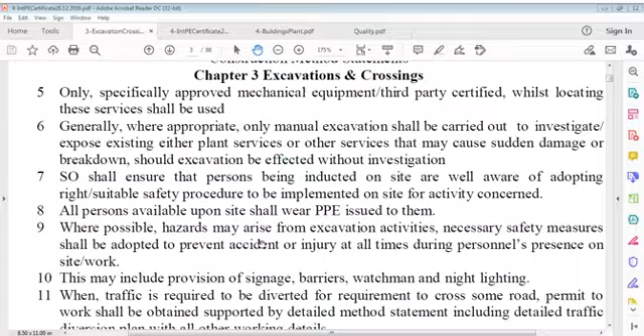Backfill for underground installations, fill grading and paving, testing laboratory, etc, etc. All these responsibilities go there. And safety, very important point, as I said.

So toolbox talks are directive ones. You have to use this, for example you have to use axe like this. You have to use the tool, you may say machine, you have to use this. The operator has to know the best way to use it.

Must have activity-based precautionary measures, and how you have to take care of preventing accidents. How people should be safe, and also what are the chances of caving in, and how you can use your spade or shovel, whatever, how you can use your generator, whatever tool you have. You can say it's talking excavation only, so you have to talk about that tool, site preparation tools.

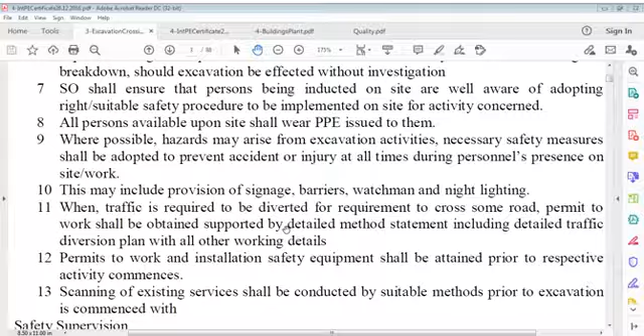When traffic is required to be diverted for the requirement of work to cross some road, a permit must be issued and obtained from the authority. That is regular law. You have to divert that area of traffic, and you have to make a diversion statement, a diversion plan, attach it with the method statement, and apply along with that method statement for that permission.

Permits to work are required for installation of safety equipment and for every activity that you do in that area. You also require services knowledge, which can include scanning of existing services, conducted by suitable methods prior to excavation starting.

Safety supervision is a very important point. A competent inspector must visit the included area daily to assess the safety measures being conducted, to make sure those safety measures are okay for that purpose. If defects or snags are found during that visit, this must be notified to the working supervisor available, who can immediately act to bring adopted safety measures to an acceptable standard.

There may be certain incidents where a utility is not identified, is discovered, or is damaged. All works must stop in that area, and the operator, shift control, and HSE department must be immediately notified.

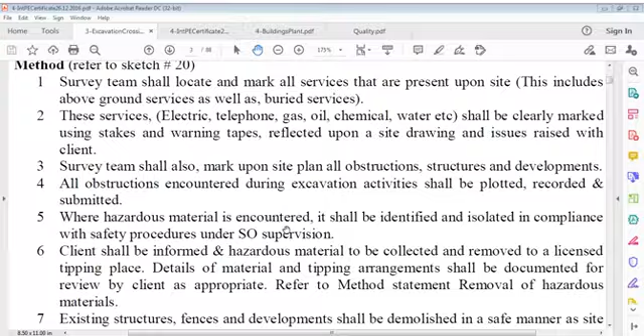Then there can be other obstructions as well during excavation, other than these services. There may be hazardous material available here and there. Likewise, there may be existing structures, fences, and developments which have to be demolished, and they have to obtain a permit for everything that's required, and figure out how these obstructions are to be removed from these existing elements, and how to handle and tackle that.

Otherwise, we have to discuss it with our clients or authority, and once something is fully exposed, we see how to handle existing soil, top soil, and bottom soil. Then, whatever terrain we have, we have to construct some access roads. We have to do something on that.

This happens: what quality of soil we have, how and what level of road we can build, what should be the structure of that, and how to compact it. This means we should have an engineer related to soil, a geotechnical engineer, and quality people. Of course, quality people come from the same background of engineering.

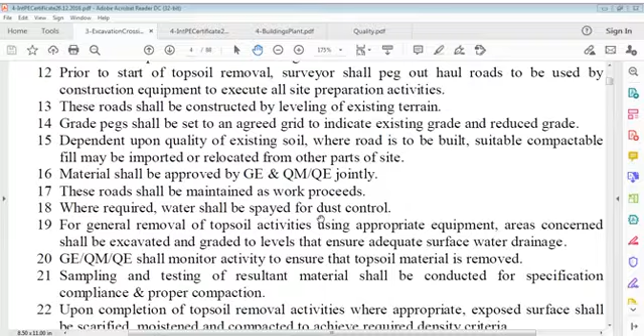And how to take care of the soil from environment impact, wind impact - all this we have to take care. It's not necessary to do it full, it depends how many tests you conduct. Then we have to transport material from one place to another and deposit somewhere, fill there, level there, add moisture there. Stockpilings are required, all these are required. There's a lot of work in that site preparation - you have to do everything required, which gives benefit of record as well as benefit of working.

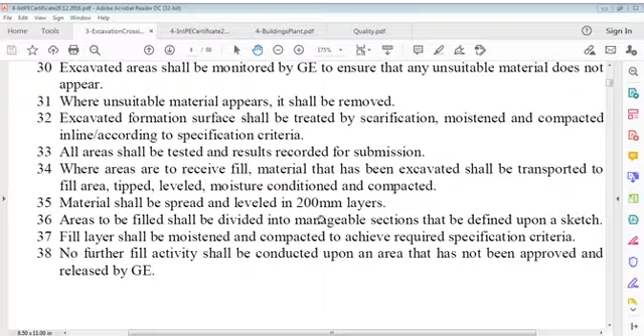We can also test the strength of soil we excavated. We have it in site, we can test it, or we can mix it with some other material and test it. That is what we discussed, and I can't speak again word by word. If I find time, I'll speak at the end, no problem.

That is what you say, verification exercise. Verification exercise for fill activity is conducted to establish economical and effective methods for fill activity in areas which are indicated below. You can say the title is verification exercise for fill activity, or to ascertain its strength - conducted to establish economical and effective methods for fill activity which are indicated below.

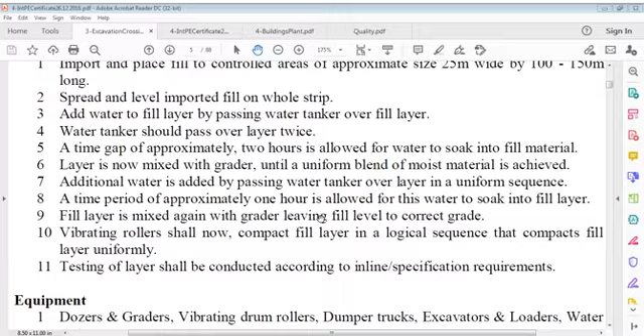Testing of layers shall be conducted according to inline/specification requirements. Then, what equipment do we need for that? We need dozers and graders, vibrating drum rollers, dumper trucks, excavators and loaders, and water tankers. These are the minimum; we have used them all in this activity.

Then there was nothing - we assume there was nothing prior to construction. The whole site was fit for preparation works, and such a project is called a greenfield project.

Once you are ready with the site, to some extent you can say all obstructions have been crossed, then you have to do something else. Now first of all, protection of existing services - services protection. It's also a very important point; you have to protect all services.

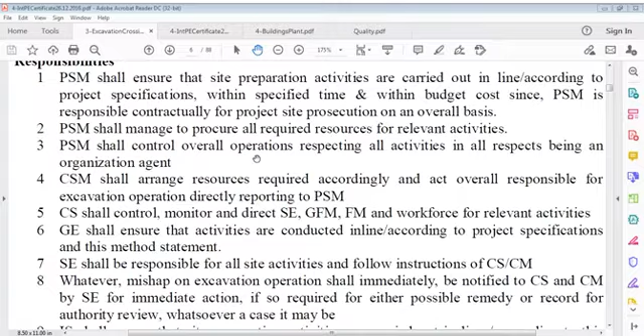Responsibilities are same as usual: project site manager, construction superintendent, infrastructure superintendent, site engineer, geotechnical engineer, safety officer, general foreman, quality control, surveyor, personal protective equipment, and so on. There's no major issue in that, and it says all the same responsibilities.

Now this was general. Now there is a specific responsibility in this, which is responsibility in addition to the foregoing general descriptions. That's also an important point to comprehend. You have to comprehend that.

The project site manager is to ensure that identification, protection, or removal, rerouting of existing services is conducted in a safe, methodical sequence as defined by this method statement, as well as directed by relevant authorities. Again, it's an important statement. You have to identify the service first, protect it, then remove it or reroute it, following the safe methodical sequence as defined by the method statement and as directed by the authority in charge of these services.

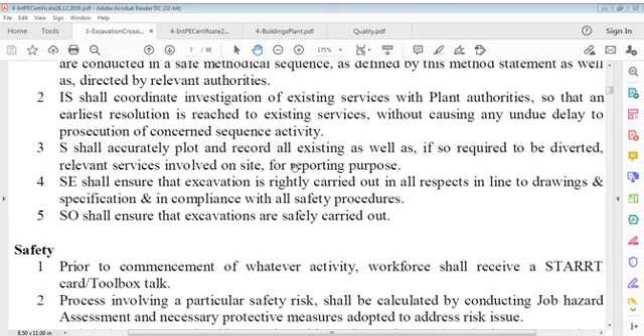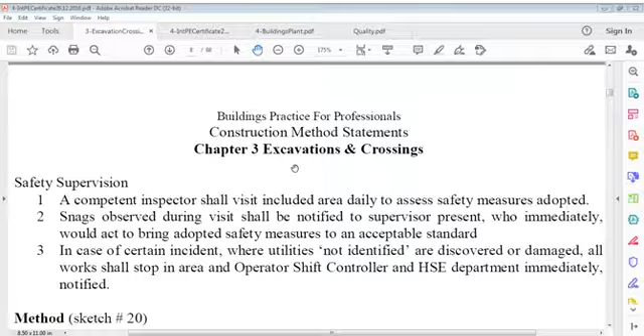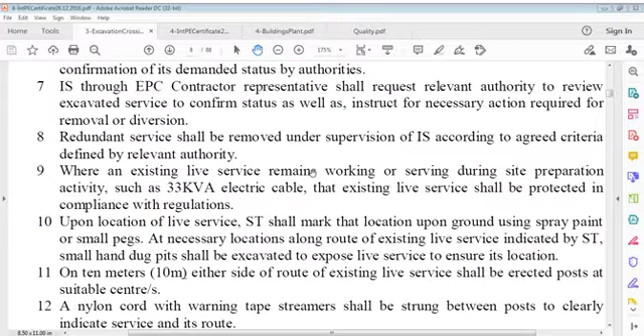Now, look, where an existing live service remains - working or serving during site preparation activity, such as a 33 kV electric cable - that existing live service shall be protected in compliance with regulations.

Upon location of that service, you can say the site team shall mark the location upon the ground using spray paint or small pegs. On both sides it will be barricaded, so nobody will be able to enter that area until it is declared safe.

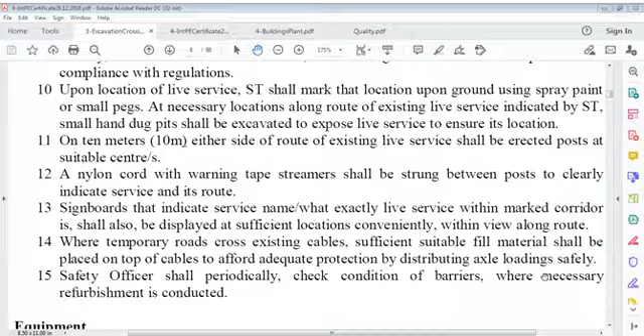Signboards that indicate service names, what exactly lies within the marked corridor, shall be displayed at sufficient locations, conveniently within view along the route. Where temporary roads cross existing cables, sufficient suitable fill material shall be placed on top of cables to afford adequate protection by distributing axle loads safely.

The safety officer periodically checks the condition of barriers where necessary, and refurbishing is conducted.

Then there are certain tools required: excavation tools, survey equipment, pegs, nylon cord, warning tape, and whatever records we have, we can say we want to reroute a certain cable.

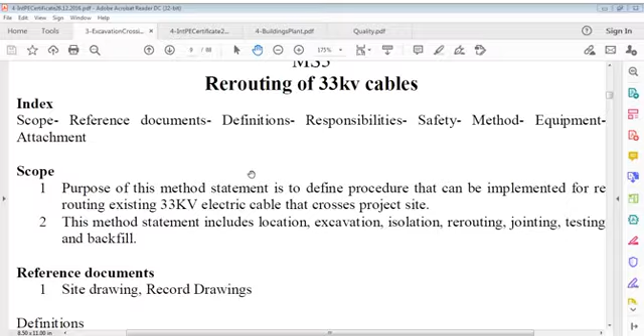The index is the same, the scope is a defined procedure that can be implemented for rerouting a certain existing cable. You can say a big one, a 33,000 volt electric cable that crosses the project site.

This method statement includes location, excavation, isolation, rerouting, and backfill. So first of all, identify where it is, then you have to excavate that, isolate it by disconnection, then reroute it, join again, test, and backfill.

Records and the same type of designations and responsibilities, we are not going to repeat them. Additional responsibilities which are very important, if you add to the existing previous normal responsibility, you can say additional responsibilities.

The project site manager is to define and ensure that the identification, protection or removal, and rerouting of existing services are conducted in a safe, methodical sequence as defined by this method statement, as well as directed by the pertinent or relevant authority.

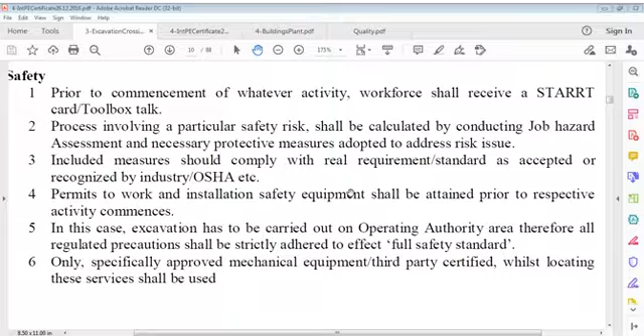Safety officials ensure excavations are safely carried out. There's nothing different here; full safety standards are to be abided by - toolbox talk, STARRT card, OSHA, all that, and same. Supervision is also the same, there's no major shift.

In case certain accidents occur, or utilities are not identified, discovered, and damaged, all work shall stop in the area, and the operator, shift control, and HSE department immediately informed to take care of that. There can be phone references, shift controller, emergency, whatever it is.

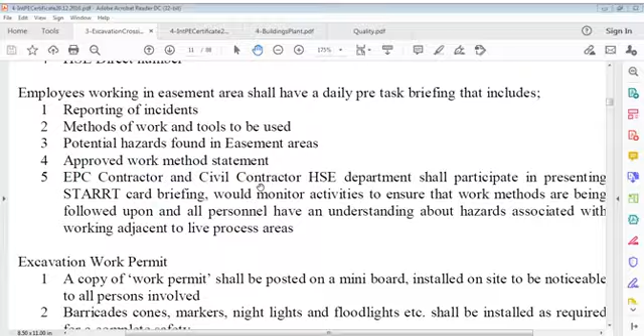Employees working in this easement area shall have a daily pre-task briefing that includes reporting of incidents, methods of work and tools to be used, and potential hazards found in easement areas, approved work method statements. EPC contractor and civil contractor departments shall participate in presenting STARRT card briefing, and would monitor activities to ensure that work methods are being followed and all personnel have an understanding about hazards associated with working adjacent to live process areas.

Work permits are required for excavation. The work permit shall be posted on a mini board installed on site, to be noticeable to all persons involved. Barricades, cones, markers, night lights, floodlights, etc. shall be installed as required for complete safety.

Flagsmen on all directions, in addition to traffic signboards. Flagmen shall be engaged to operate full time to direct traffic about excavation work in progress by waving flag signals for all vehicles passing by.

Excavation to expose services should be carried out manually. In case certain services not shown on record drawings, such as fiber optics, are discovered, further excavation shall be ceased until a decision for employing the hydro jetting method is taken up by plant authorities to be adopted for further excavation.

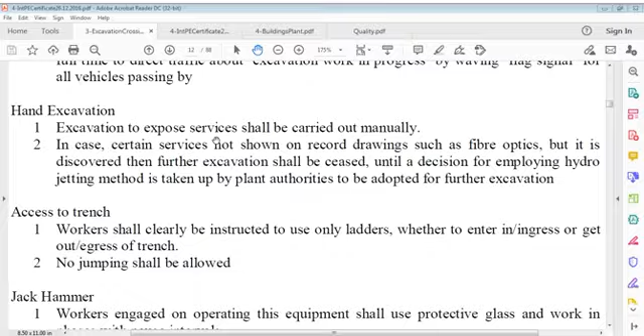Trench access means workers shall clearly be instructed to use only ladders, whether to enter in or egress out of the trench. Jumping is not allowed.

Workers engaged in operating equipment such as jackhammers shall use protective glass and work in phases only with rest pauses.

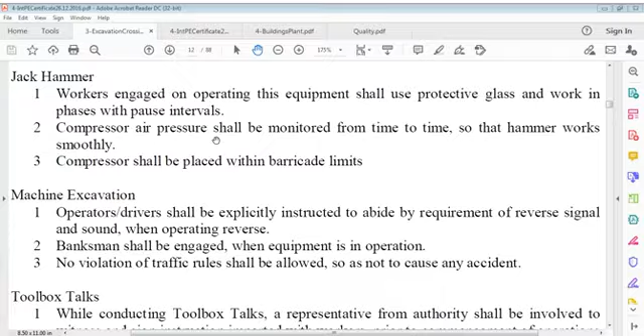Machine excavation: operators shall be explicitly instructed to abide by the requirement of reverse signal and sound when operating reverse. Banksmen to be engaged when equipment is in operation. No violation of traffic rules allowed so as not to cause any accident.

Toolbox talk: while conducting toolbox talks, a representative from the authority shall be involved to witness and sign instructions imparted to workers prior to commencement of operations. For record purposes, only English literate foremen shall be employed to work on excavation execution. Traffic management if required.

Signboards keep up: all personnel shall be briefed about safe keep up of signboards, barricades, cones, markers, and night lights, floodlights shall be arranged as required for complete safety.

No oil spillage shall be allowed. Sides of excavation shall be sloped with barriers placed to indicate excavation work in progress.

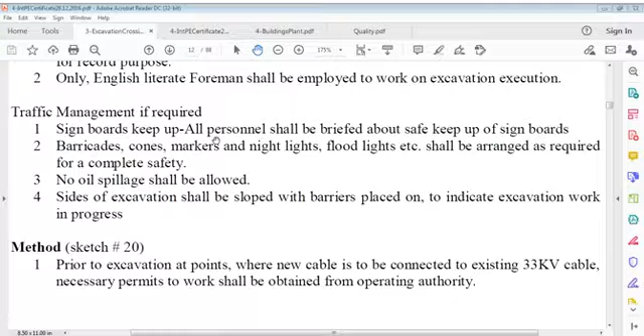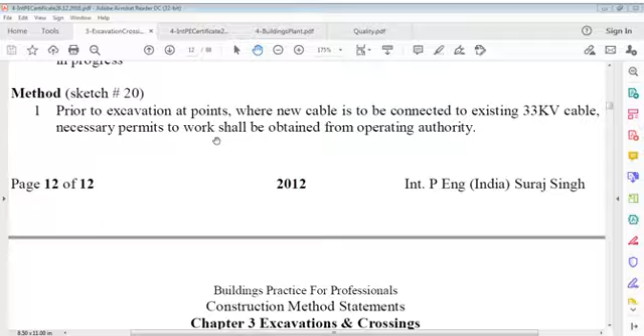So there are certain points from the flagman, from the excavation work permit, which covers what the flagman has to do, how hand excavation is to be done, how access to the trench is to be done, operation of jackhammer, machine excavation, toolbox talks, traffic management, and further points prior to excavation where a new cable is to be connected to an existing cable. Necessary permits to work shall be obtained from the operating authority.

EPC contractor method statement for conducting cable diversion shall be complied with. Existing route of the 33 kV cable shall be identified, marked, and barrier erected on either side, clearly defining the route access site.

When excavation has reached the required level, an appropriate sand bed shall be placed within the trench.

New cable supplied by the EPC contractor shall be laid into the trench in line according to approved drawing methods and standards. This includes placing of cable drums on a cable trolley and rollers.

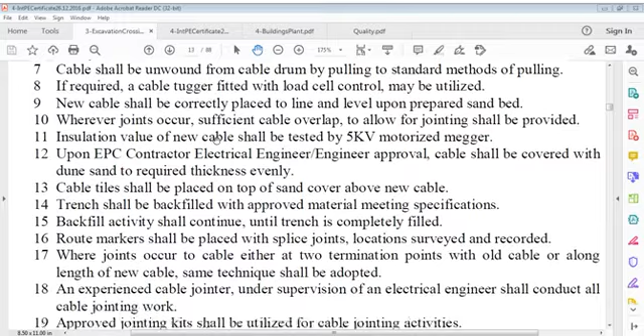Cable shall be covered with dune sand to required thickness evenly. Cable tiles shall be placed on top of the sand cover above the new cable.

Trench shall be backfilled with approved material meeting specifications. Backfill activity shall continue until the trench is completely filled. Route markers shall be placed at splice joints.

Locations surveyed and recorded. Where joints occur in the cable, either at two termination points with the old cable or along the length of the new cable, the same technique shall be adopted. An experienced cable jointer, under supervision of an electrical engineer, shall conduct all cable jointing work.

Approved jointing kits shall be utilized for cable jointing activities. Manufacturer's recommendations relating to installation of these jointing kits shall be complied with.

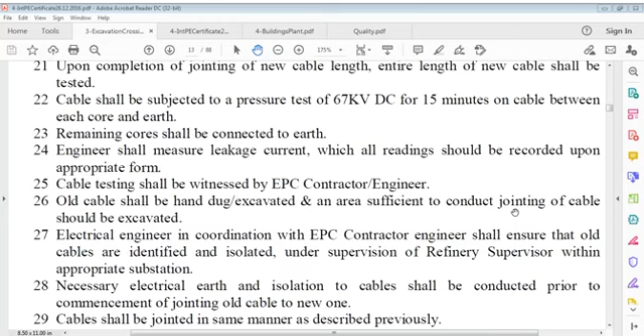The engineer shall measure leakage current, and all readings shall be recorded upon the appropriate form. Cable testing shall be witnessed by the EPC contractor engineer. The old cable shall be hand dug.

An area sufficient to conduct jointing cable should be excavated. Electrical engineer in coordination with EPC contractor engineer shall ensure that old cables are identified and isolated under supervision of refinery supervisor within appropriate substation.

Necessary electrical earth and isolation to cables shall be conducted prior to commencement of jointing old cable to new cable. Cable shall be jointed in same manner as described previously. Once old and new cable have been joined, these shall be tested by mega test at 5000 volt and HV test at 53 kV DC to establish its integrity and insulation.

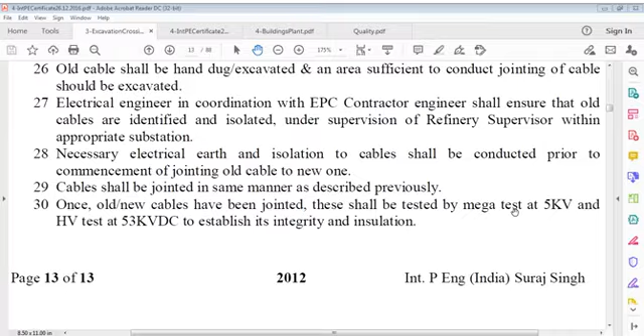Disbanded cable shall be removed from new joint cable by excavating and rolling cable. New cable route corridor shall be covered with sand, cable tiles and backfill material. Upon completion of cable testing activities, refinery electrical engineer shall authorize energizing of new cable route.

Disbanded cable route shall be excavated to expose old cable. Old cable shall be removed onto surplus cable drums from which new cable was coiled. These drums shall be stored on site for EPC contractor disposal.

A program to be developed by all parties of power outage windows shall be produced for tying activities of cables. Tying activities require equipment such as excavator, drum trucks, dump trucks, cable drum trolley, cable trolleys, and cable tugger with load cells. Attachment is contractor standard method statement for cable diversion.

This statement may be submitted by civil works contractor on behalf of EPC. EPC standard method statement is required to be attached.

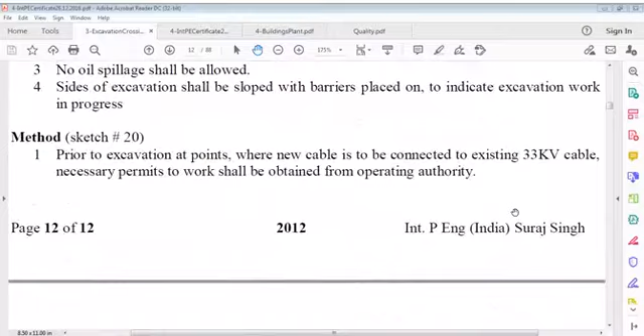So this is a very important point. Prior to excavation at points where new cable is to be connected to existing cable, necessary permits to work shall be obtained, and then you can have some more reading here.

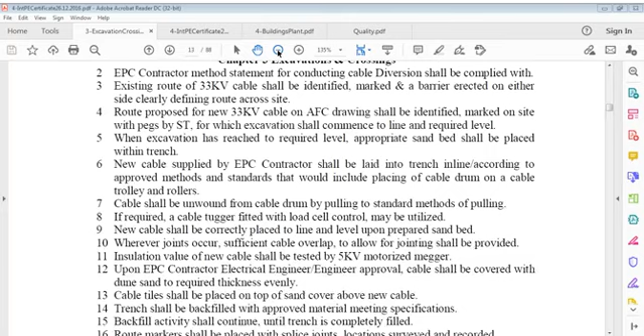Better read for 5-10 minutes so it's better to understand. Everyone can do it better, I think. Meanwhile, just take 5 minutes here, I'll be back in 5 minutes. It's better to understand this, it's a very important point, very very important to understand, because electrical cable is shifting. That's the important point, okay.

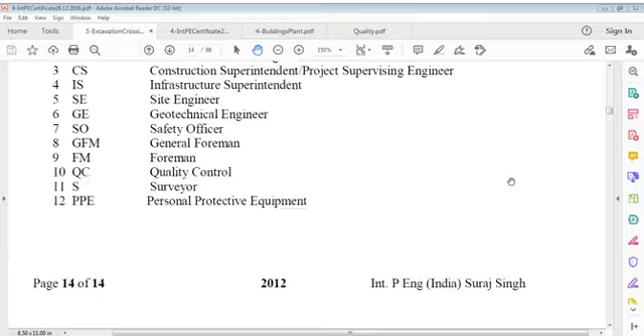I repeat only these designations. Project Site Manager means PSM. CSM stands for Construction Site Manager. CS stands for Construction Superintendent or Project Supervising Engineer. IS stands for Infrastructure Superintendent. SE stands for Site Engineer. GE stands for Geotechnical Engineer. SO stands for Safety Officer. GFM stands for General Foreman. FM stands for Foreman. QC stands for Quality Controls. S stands for Surveyor. PPE stands for Personal Protective Equipment.

And these responsibilities, I don't want to repeat them, no need. But it's better once you report so that you refresh, no problem.

PSM shall ensure that site preparation activities are carried out in line according to project specifications within a specified time and within budget costs, since PSM is responsible contractually for project site prosecution on an overall basis. PSM shall manage to procure all required resources for relevant activities. PSM shall control overall operations, respecting all activities in all respects, being an organization agent.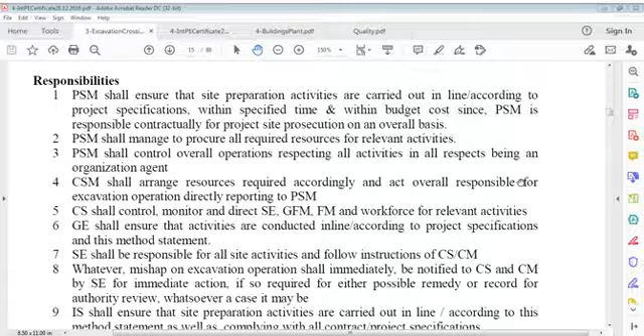CSM shall arrange resources required accordingly and act overall responsible for excavation operation, directly reporting to PSM. CS means Construction Superintendent shall control, monitor and direct SE, GFM, FM and workforce for relevant activities.

GE shall ensure activities are conducted in line according to project specifications and this method statement. SE shall be responsible for all site activities and follow instructions of CS and CM. Whatever mishap on excavation operations shall immediately be notified to CS and CM by SE for immediate action if required, for either possible remedy or a record for authority review, whatsoever the case may be.

IS shall ensure that site preparation activities are carried out in line according to this method statement, as well as complying with contract project specifications.

GFM, General Foreman, shall be responsible for the whole lot of workforce available on site for distribution, extraction of output, redeployment, supervision and controls.

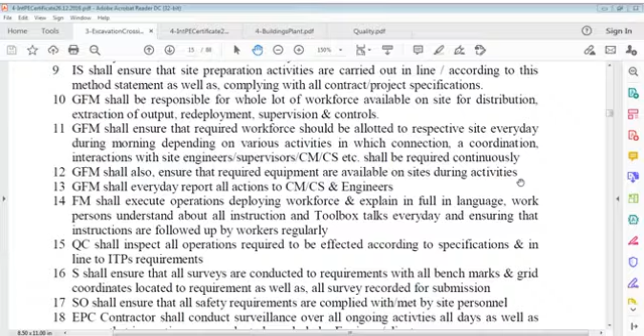FM shall execute operations, deploying workforce and explaining in full in language work persons understand all instructions and toolbox talks every day, ensuring that instructions are followed by workers regularly.

QC, quality control, shall inspect all operations required to be effected according to specifications and in line with ITP's requirements.

Surveyor shall ensure that all surveys are conducted to requirements with all benchmarks and grid coordinates located as per requirements. All surveys shall be recorded for submission.

Safety officer shall ensure that all safety requirements are complied with and met by site personnel. EPC contractor shall conduct surveillance over all ongoing activities every day, as well as ensure that inspections are conducted regularly by engineers and client.

Additional responsibilities: surveyor shall accurately plot and record all as-built marks respecting bedding, pipes and finished ground. Site engineer shall ensure that excavation is rightly carried out in all respects in line with drawings and specifications and in compliance with all safety standard procedures.

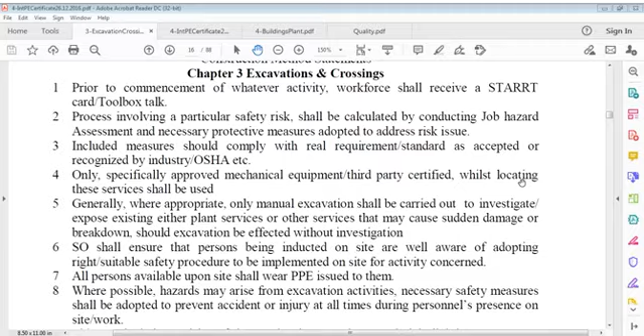Safety officers shall ensure that excavations are safely carried out and equipment operators comply with safety procedures. Again, this is the same as what we discussed about STARRT cards, toolbox talks and OSHA requirements, and whatever is required is to be done regarding hazards. Supervision is also the same.

Now let's discuss methods, sketch 25. Let us see what sketch 25 says. I'll chart out the sketch first of all.

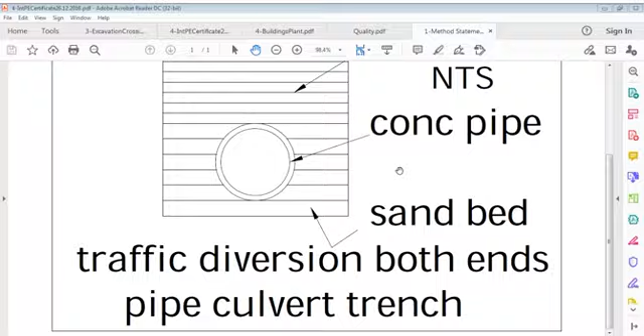Sketch 25. In this sketch 25, I have to find out... manage. Sketch 25. What is that? Okay, let's open this, I think it's the same. Okay, sketch 25, let's open this, see what we are talking about. See what it is. All right, we got it.

Now, setting out: edge coordinates of pipe shall be calculated from information on drawings as well as allowing for a 1:1.5 slope, and fixed in such a way that full length of pipes are used without pipe cutting.

Center line and actual width shall be marked on ground. We can refer to sketch 25.

Trench shall be excavated to correct width, length and formation using a hydraulic backhoe. Once bulk excavation is completed, wooden pegs shall be inserted showing elevations marked on them to guide and complete excavation and define formation level.

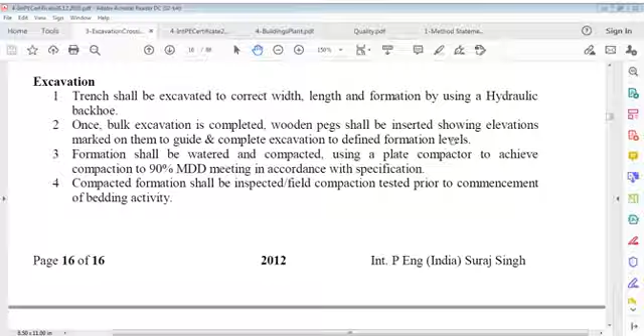Once excavation is complete and approved, bedding material shall be placed to a thickness of 150 mm, watered and compacted in compliance with specifications. Compacted surface shall be inspected, tested and approved.

Pipe work: socket position shall be set out on prepared bed. Manual excavation shall be carried out for the socket portion, ensuring that the barrel of the pipe rests firmly on bedding.

Concrete pipes shall be transported from store to location of trench and gently lowered into trenches with a crane using belt slings only, not chain slings, because this is a circular pipe and we can't erode the external surface of this barrel.

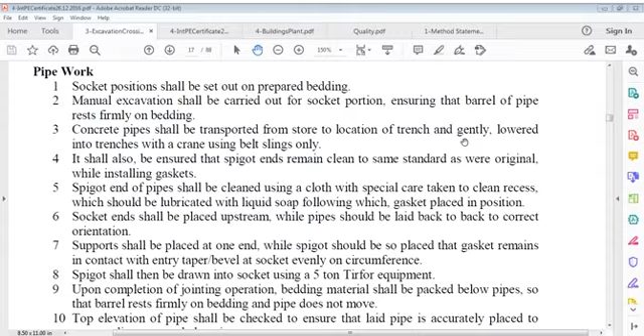It should also be ensured that spigot ends remain clean to the same standard as original while installing gaskets. Spigot end of pipes shall be cleaned using a cloth, with special care taken to clean recesses, which should be lubricated with liquid soap, following which the gasket is placed in position.

Spigot ends of pipes shall be cleaned using a cloth with special care taken to clean recesses, which should be lubricated with liquid soap, following which the gasket is placed in position. Socket ends shall be placed upstream, while pipes should be laid back to back to correct orientation.

Support shall be placed at one end, while the spigot should be so placed that the gasket remains in contact with the entry taper or bevel at the socket, even around the circumference.

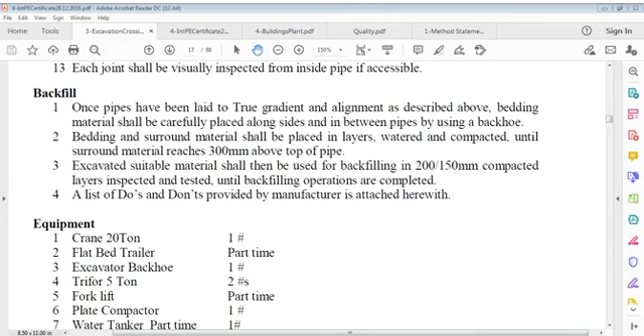Excavated suitable material shall then be used for backfilling in 200 or 150 mm compacted layers, inspected and tested until backfilling operations are completed. A list of do's and don'ts provided by manufacturers is attached herewith, for pipe safety and pipe handling.

Equipment: a 20 ton crane, one number; flat bed trailer, part-time; spring pipe flat bed trailer; excavator backhoe and 5-ton Tirfor, two numbers; forklift, part-time; plate compactor, one number; water tanker, part-time. Workers: foreman 1, pipe fitter 2, and workers 4 numbers, pure workers.

Manufacturer's data sheet respecting the pipe.

Culvert crossing to avenue and main highway. Culvert crossings. Scope is to define sequence and methodologies for excavation, placement of culvert pipes, backfill and reinstatement to culvert crossing on the avenue and main highway next to the retention pond.

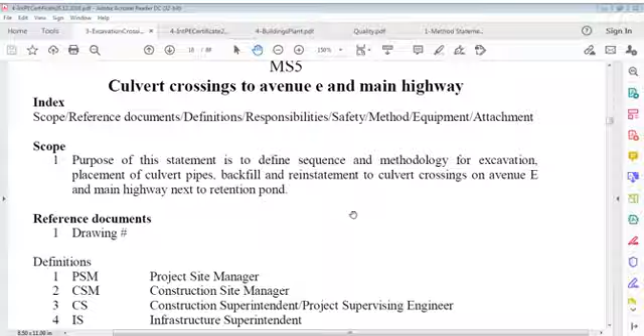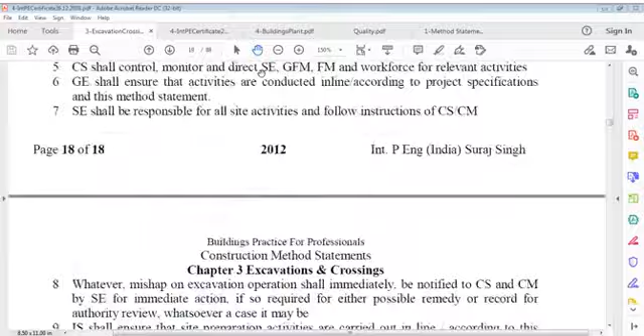Definitions are the same, 1 to 12. Responsibilities are completely the same, with some additional responsibility: surveyor and assistant surveyor shall accurately plot and record all as-built marks respecting bedding pipes, asphalt and finished ground.

Site engineer and superintendent, or surveyor and site engineer and safety officer, shall ensure that traffic diversion works well from a safety viewpoint. Site engineer shall ensure that excavation is rightly carried out in all respects in line with drawings and specifications, and in compliance with all safety procedures.

Safety officer shall ensure that excavations are safely carried out, that equipment operators comply with safe procedures, and that vehicles on the highway are not impeded from smooth movement. The project's safety manager and project site manager shall ensure that regarding work involving highways, police or the concerned authority is informed in time for assisting controls.

Now, same toolbox talk and OSHA permit to work, and in case excavation has to be carried out in an operating area, then regulatory precautions must be strictly affected to the full safety standards.

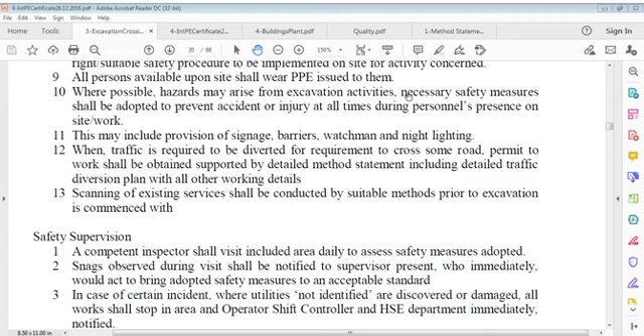Scanning of existing services shall be conducted by suitable methods prior to excavation being commenced with. I repeat these important points, same as before, in case of highways. Prior to commencement of any activity, work shall receive a start card, toolbox talk, for the process involved.

Safety tasks shall be evaluated by conducting job hazard assessment, with necessary protective measures adopted to address risk issues. Included measures should comply with relevant requirement standards as accepted or recognized by industry, including occupational safety health assessment. Permits to work and installation safety equipment shall be obtained prior to respective activity commencement.

In case excavation has to be carried out on operating authority area, all regulatory precautions shall be strictly adhered to, affecting full safety standard. Only specifically approved mechanical equipment, third party certified, whilst locating these services shall be used.

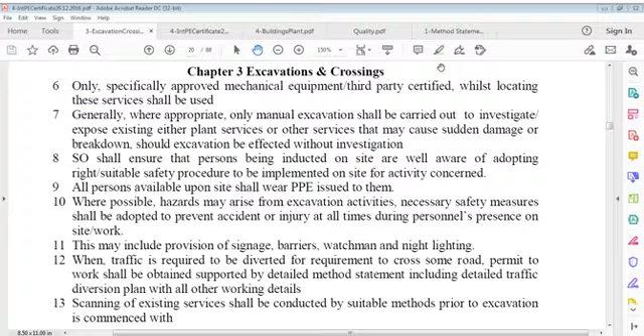When traffic is required to be diverted for a requirement to cross some road, a permit to work shall be obtained, supported by a detailed method statement, including a detailed traffic diversion plan with all other working details.

Scanning of existing services shall be conducted by suitable methods prior to excavation being commenced with. A competent inspector shall visit the included area daily to assess safety measures adopted.

Snags observed during the visit shall be notified to the supervisor present, who shall immediately act to bring adopted safety measures to an acceptable standard. In case of an incident where utilities not identified are discovered or damaged, all work shall stop in the area and the operator shift controller and HSE department immediately notified. An emergency number should be given.

Employees working in easement areas shall have a daily pre-task briefing covering reporting of incidents, method of work, tools to be used, potential hazards found in easement areas, and approved work method statements, for both EPC contractor and civil contractor.

The HSE department shall participate in presenting start card briefings and monitor activities to ensure work methods are being followed, and that all personnel have an understanding of hazards associated with working adjacent to live process areas.

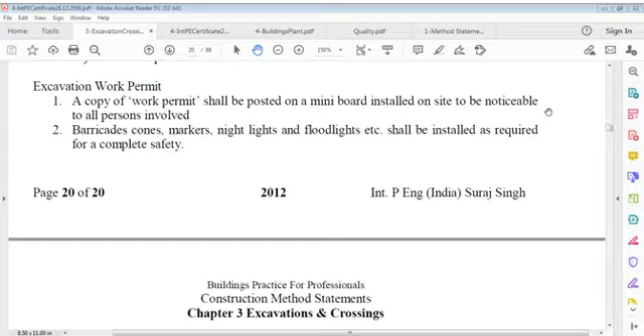Barricades, cones, markers, night lights and floodlights shall be installed as required for complete safety. Flagsmen on all directions: in addition to traffic signboards, flagsmen shall be engaged to operate full time to direct traffic about excavation work in progress by waving flag signals for all vehicles passing by.

Hand excavation: excavation to expose services shall be carried out manually in case certain services not shown on drawings, such as record drawings for fiber optics, are discovered. Further excavation shall be ceased until a decision for employing the hydro jetting method is taken up by plant authorities to be adopted for further excavation.

Access to trench: workers shall clearly be instructed to use only ladders, whether to enter or egress the trench. No jumping allowed.

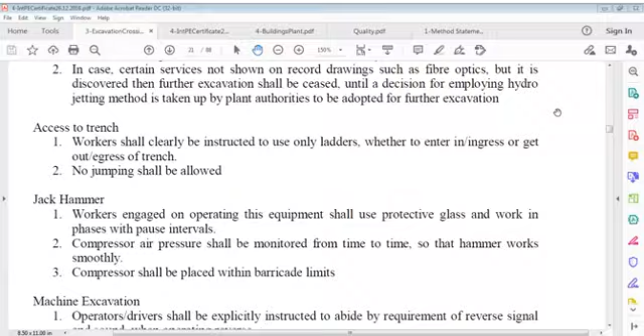Jackhammer: workers engaged on operating shall use protective glass and work in phases with pause intervals. Compressor pressure shall be monitored from time to time so that the hammer works smoothly. The compressor shall be placed within barricade limits.

Machine excavation: operators and drivers shall be explicitly instructed to abide by requirements of reversal signals and sound when operating in reverse. Banksmen shall be engaged when equipment is in operation. No violation of traffic rules is permitted so as not to cause any accident.

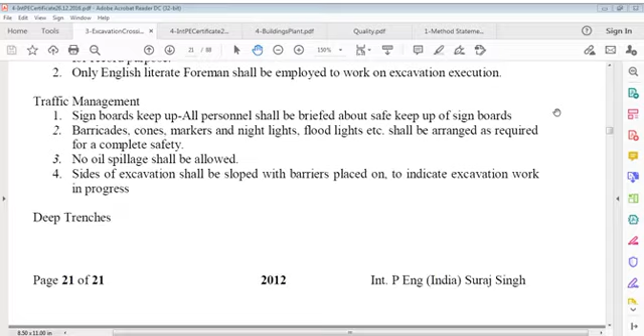Since proposed excavation is considerably wide and deep, all safety measures shall be resorted to, and if required, shoring shall be provided to prevent caving in.

Trench depth being more than 1200 mm, adequate means of exits such as either aluminum ladder or steps shall be provided and located not more than 8 meters of lateral travel.

Existing services: 2 number electric poles and other various categories of about 8 to 10 number running services, ducts, cables etc., shall be properly diverted according to regulatory requirements and preserved until reinstated.

Precast members. Since precast culvert units, covers and sleepers are heavy in load, proper care has to be exercised during raising and lowering or handling to exact locations, strictly adhering to relevant safety measures.

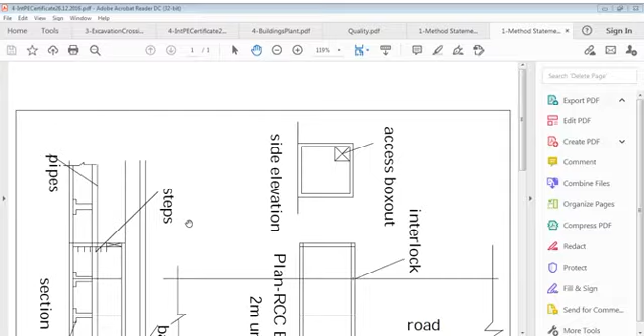So this is the RCC box culvert. Side elevation: this is the RCC box culvert longitudinally. This is 2 meter units here. This is the interlock here. This is the road, and this is the box culvert. This is the plan of RCC box culvert single unit. So this is the road here.

This is the section here, you can see what the section says. These are the steps. This is the section, and these are the sleepers for these pipes, the box culvert is resting on these sleepers, continuous like this. This is backfill, and then this road on top. Now it's very clear: RCC box culvert resting on pipe sleepers.

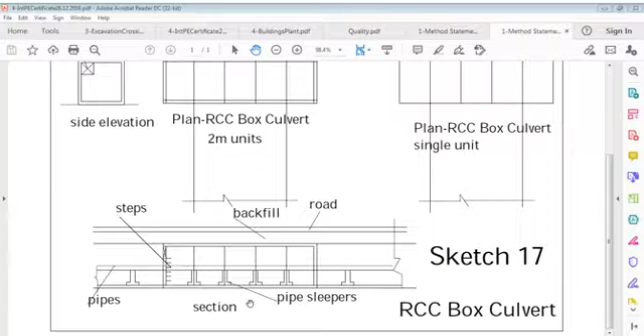You see the section, this is of course how we are working, see how we are doing this. So it's very easy, I think, 2 meter box units. So what it says, let us see. This is the interlock here, each pipe culvert is interlocked. Backfill here, this road. I think it's easy, not difficult. I think it is not difficult. Let us see how it works. It works now, you can see this there, and it is here.

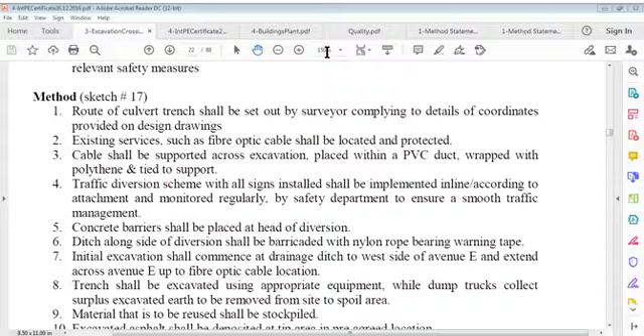Sketch 17. So what is sketch 17 now saying? What it says:

Provided on drawings. Route of culvert trench shall be set out by surveyor complying to details of coordinates provided on design drawings. That's okay, we will go this way, and we're talking about quality, so that's okay.

Existing services such as fiber optic cable shall be located and protected. Cable shall be supported across excavation, placed within a PVC duct, wrapped with polythene and tied to support.

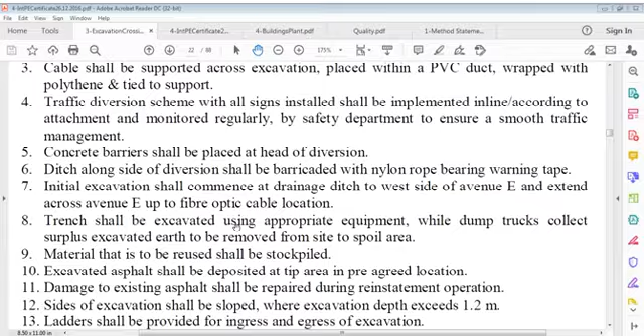Traffic diversion scheme with all signs installed shall be implemented in line with the attachment and monitored regularly by the safety department to ensure smooth traffic management. Concrete barriers shall be placed at the head of the diversion.

Ditch alongside the diversion shall be barricaded with nylon rope bearing warning tape. Initial excavation shall commence at the drainage ditch to the west side and extend across Avenue E up to the fiber optics cable location.

So this is just the name and size. Don't be shy guys, write it down.

Trench shall be excavated using appropriate equipment while dump trucks collect surplus excavated earth to be removed from site to the spoil area. Material that is to be reused shall be stockpiled.

Excavated asphalt shall be deposited at the tip area in a pre-agreed location. Damage to existing asphalt shall be repaired during the reinstatement operation. Sides of excavation shall be sloped.

Where excavation depth exceeds 1.2 meters, a ladder shall be provided for ingress and egress of the excavation. Ladder shall be located every 8 meters if required, depending on the length of excavation. A banksman shall be provided to monitor excavation machine operations.

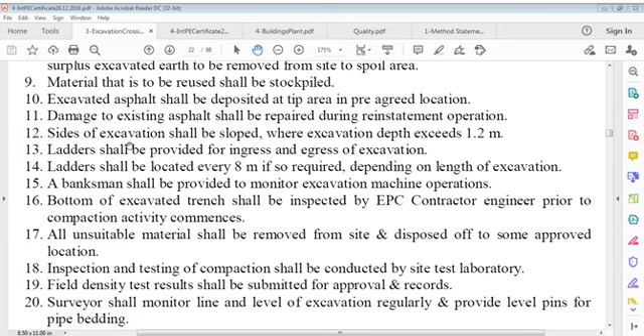Machine operations. Bottom of the excavated trench shall be inspected by the contractor's engineer EPC prior to compaction activity commencing.

All unsuitable material shall be removed from site and disposed of to an approved location. Inspection and testing of compaction shall be conducted by the site testing laboratory. Field density test results shall be submitted for approval and records.

Surveyor shall monitor line and level of excavation regularly and provide level pins for pipe bedding. Approved bedding material shall be placed and compacted to required levels and density values.

Site testing laboratory shall conduct field density tests and report accordingly. Concrete culvert pipe shall be placed correctly to line and level as shown in the IFC drawings.

Pipes shall be inspected for damage prior to placement; only if there is no damage can pipes be placed. Spigot head on culvert pipe shall be on the upstream end of pipes.

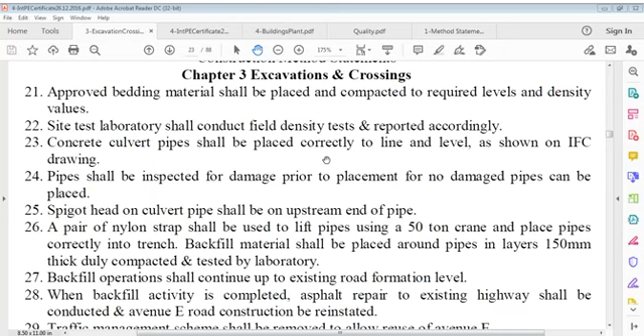A pair of nylon straps shall be used to lift pipes using a 50-ton crane and place the pipe correctly into the trench.

Backfill material shall be placed around pipes in layers 150 mm thick, duly compacted and tested by the laboratory.

Backfill operation shall continue up to existing road formation level. When backfill activity is completed, asphalt repair to the existing highway shall be conducted and the avenue road construction reinstated.

Temporary security fence shall be erected to the agreement requirement of the security police.

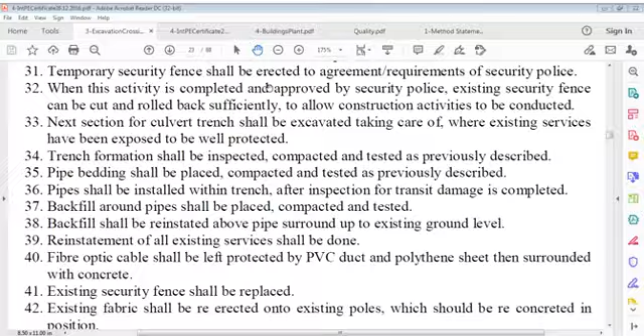Backfill shall be reinstated above the pipe surround up to existing ground level. Reinstatement of all existing services shall be done. Fiber optical cable shall be left protected by PVC duct and polythene sheet, then surrounded with concrete.

Existing security fence shall be replaced. Existing fabric shall be re-erected onto existing poles, which should be concreted in position.

Barbed wire shall be replaced using new material where required. Temporary security fence shall be removed.

Final section of culvert trench shall be set out and excavated in the same sequence as previously given. Compaction and testing of pipe bedding shall be carried out. Placement of pipes to correct lines and levels shall be carried out.

Backfilling of pipe surround shall be conducted. Reinstatement of backfill above pipe surround material shall be conducted. Site test laboratory shall conduct field density tests.

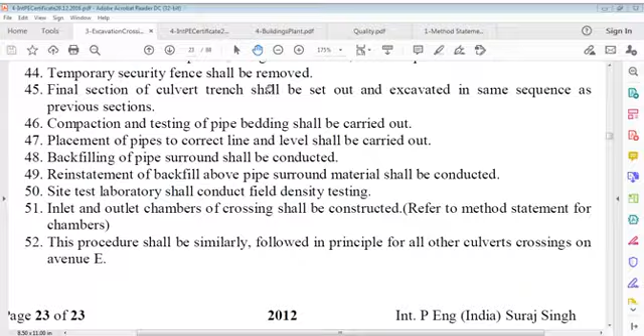On excavators, dump trucks, compactors - so those were the points of this. This is about the points, I can say around 50 points here.

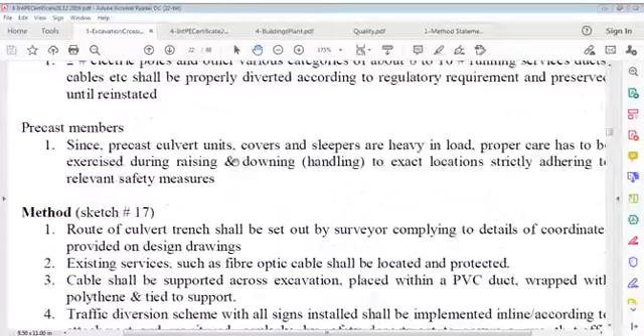I have to understand these points very clearly. Very clearly, these points must be understood, because it's no joke.

You can see the route of the culvert trench, setting, then existing services, then cables, then traffic diversion, then concrete barriers, then ditch alongside the diversion, barricade, excavation, trench, excavation with machines, materials to be used, excavated material to be expelled, to be deposited to the area, damage to existing asphalt, side excavation.

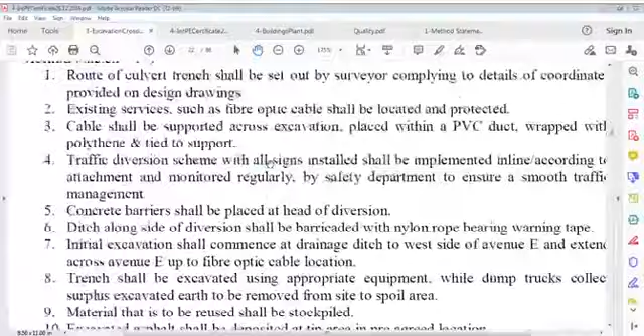Let's take a little look at this - 5 minutes, just a minute please. Just 5 minutes, look please, so that you understand well.

It's at certain points which you can read very well. I'll refer you to reading, and I'll give another reading. Take 5 minutes to read this, it's good for everybody. Just read, please, give me a chance to let me read. The most important points must be well understood.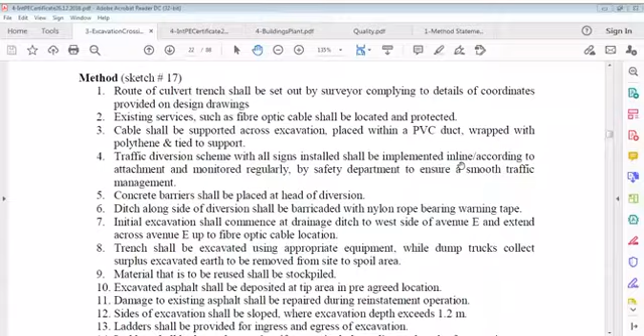These are points which I said in sketch 17, which was the route of culverts, etc, up to all this. And here too, all this we will repeat, no problem. Now we'll go to excavation, operating authority control areas, and we have to see how it works.

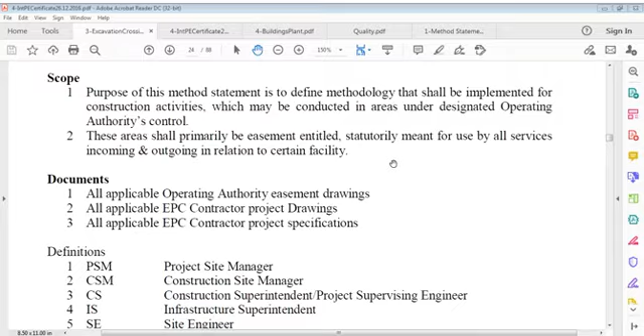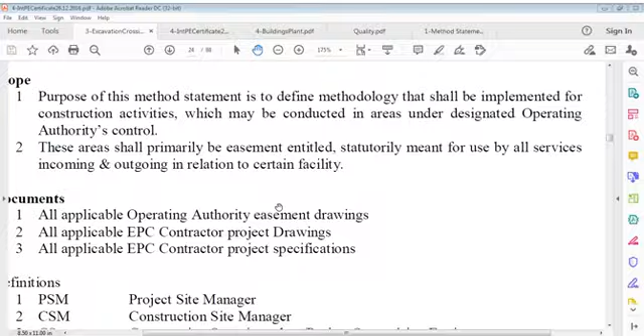Index in scope is different, and that is: method statement to define methodology that shall be implemented for construction activities which may be conducted in areas under designated operating authority's control. These areas shall primarily be easement entitled, statutorily meant for use by all services incoming and outgoing in relation to certain facility.

These documents being operating authority easement drawings, EPC Contractor project drawings, and EPC Contractor project specifications. Designations are same, responsibilities are same. An added responsibility: the surveyor shall accurately plot and record all as-built marks, that's okay.

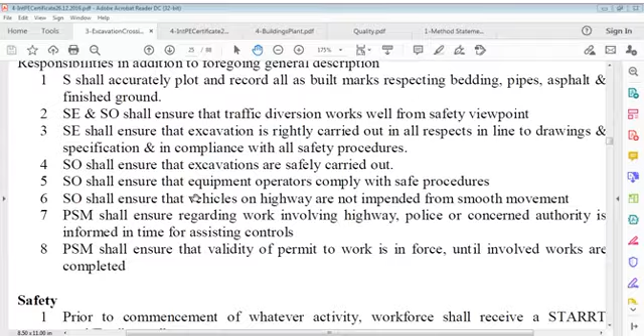Surveyor shall accurately plot and record all as-built marks respecting bedding, piping, asphalt, finished ground. Site engineer and safety officer ensure that traffic diversion works well from a safety viewpoint. Site engineer shall ensure that excavation is rightly carried out in all respects in line with drawings and specifications and in compliance with all safety procedures. So safety officers shall ensure that excavations are safely carried out.

Safety officers shall ensure that equipment operators comply with safe procedures. Safety officers shall ensure that vehicles on the highway are not impeded from smooth movement. Project site manager shall ensure that work involving highways has police or concerned authorities informed in time for assisting controls. The permit is valid until the involved works are completed. Prior to commencement, STARRT card and all that safety issues we have, nothing different in that.

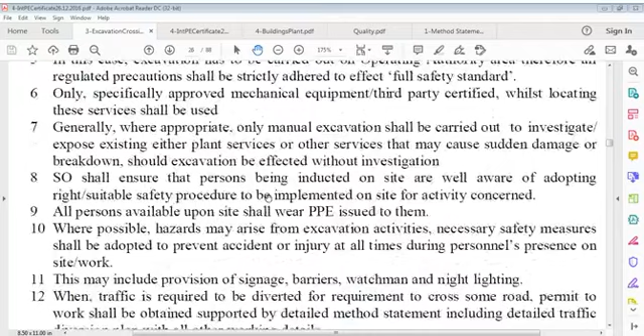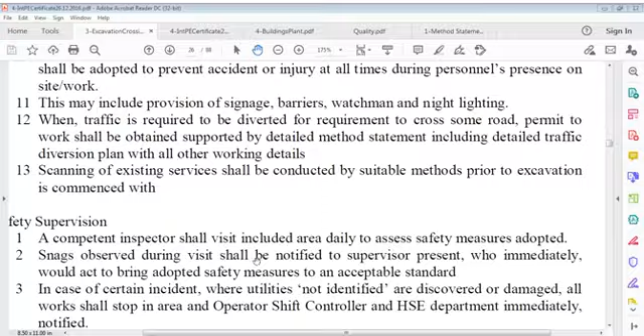Wherever possible hazards may arise from excavation activities, necessary safety measures will be adopted. This is all the same. Traffic is required to be diverted, okay, it's fine, diverted where required to cross some roads. Permit to work shall be obtained, scanning of services, safety supervision - same, nothing different in that. Telephone numbers, so it says...

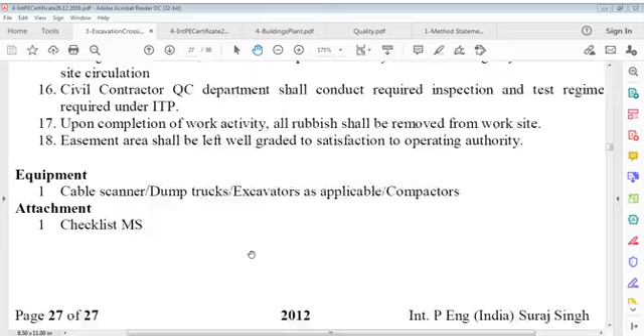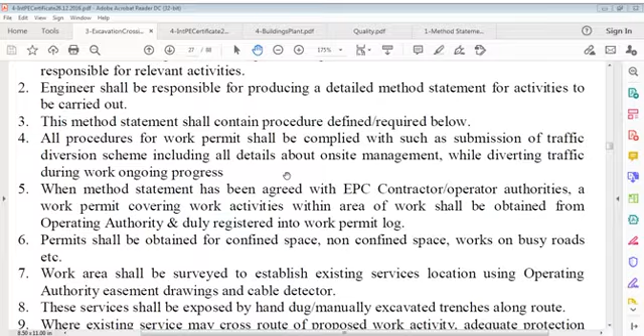Construction manager shall assign an engineer and construction foreman to be responsible for relevant activities. The engineer shall be responsible for producing a detailed method statement for activities to be carried out. This method statement shall contain the procedures defined below, including all procedures for work permits, such as submission of the traffic diversion scheme.

This includes all details about on-site management while diverting traffic during ongoing works. When the method statement has been agreed with the EPC contractor and operating authorities, a work permit covering work activities within the area shall be obtained from the operating authority and duly registered into the work permit log. Permits shall be obtained for confined space, non-confined space, works on busy roads, etc.

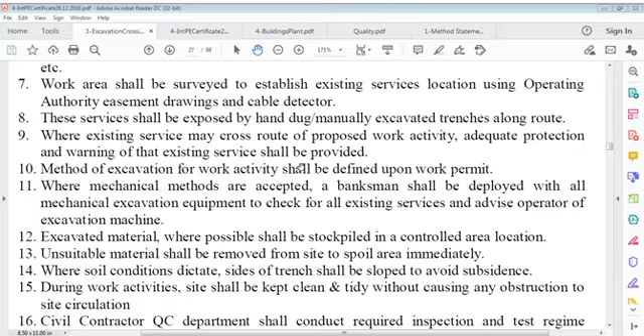The work area shall be surveyed to establish existing services' locations using operating authority easement drawings and cable detectors. These services shall be exposed by hand-dug, manually excavated trenches along the route where existing services may cross the route of the proposed work activity.

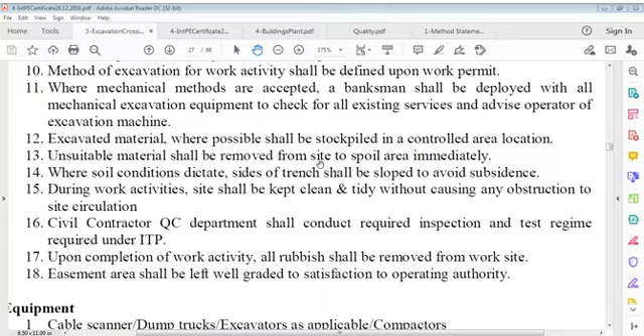Adequate protection and warning of existing services shall be provided. The method of excavation for the work activity shall be defined upon the work permit. Where mechanical methods are accepted, a banksman shall be deployed with all mechanical excavation equipment to check for existing services and advise the operator of the excavation machine.

Excavated material, where possible, shall be stockpiled in a controlled area location. Unsuitable material shall be removed from site to the spoil area immediately. Where soil conditions dictate, sides of the trench shall be sloped to avoid subsidence. During work activities, the site shall be kept clean and tidy without causing any obstruction to site circulation.

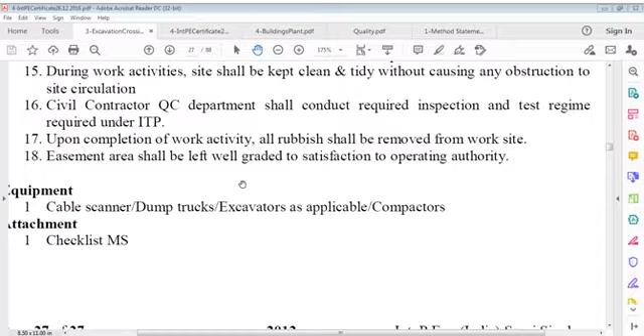The civil contractor QC department shall conduct required inspections and test regime required under ITP. Upon completion of the work activity, all rubbish shall be removed from the work site. The easement area shall be left well graded to the satisfaction of the operating authority. Equipment such as cable scanner, dump trucks, excavators as applicable, and compactors are on the checklist as assigned.

It's not going to work anymore. Already... Okay, no problem, we'll take some time on this. And I'd like to take this - also the building plans I closed because I did not say anything on this today.

So, what do you say? We've gone through some statements already, and this way it's very well to understand the regime of site design, how site design works. That is a very important point you have to be clear with. I'll take your leave now. Thank you very much, gentlemen.

I could go to 3 hours also, 15 minutes, no problem. This is some of the time to do it - everything is not possible in one day. It's 14 minutes, so it doesn't look nice if I continue, because I have to speak a lot on this. I understand a lot of issues on quality, and if you follow like this, I'll send these method statements.

It's general, not exactly what you have to do - what you do in sites and building sites, all the plants where you work in your profession or somewhere else. You must be aware of all this. It's just a standard I'm giving, not something particular. This is a standard to follow and understand.